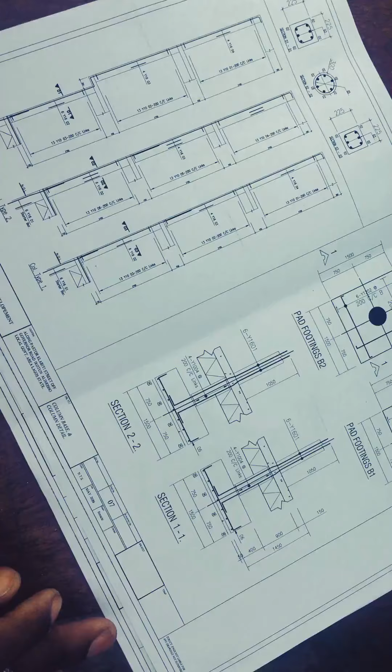In this video I'm just gonna be explaining to you about the column base and the column detail. Here we have the column base, here we have the column section for the underground one, and then here we have the column going up.

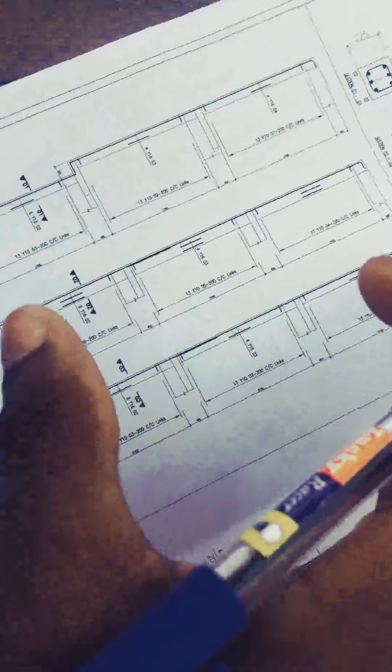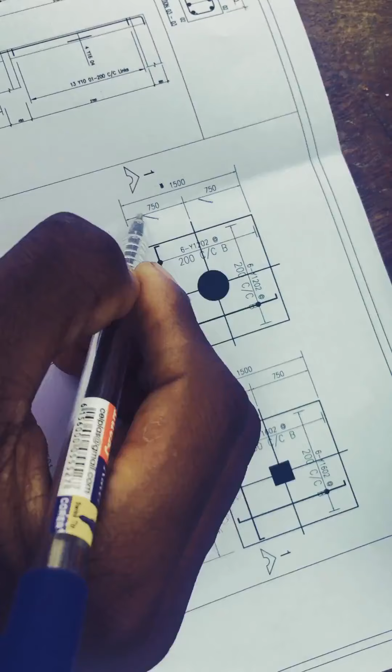So here on the column base, this dimension indicates the overall dimension of the column base, the pad footing, and here also indicates that it is the overall dimension. Here indicates that from the middle of the column base to the side, we have 750 mm and 750 mm to the side.

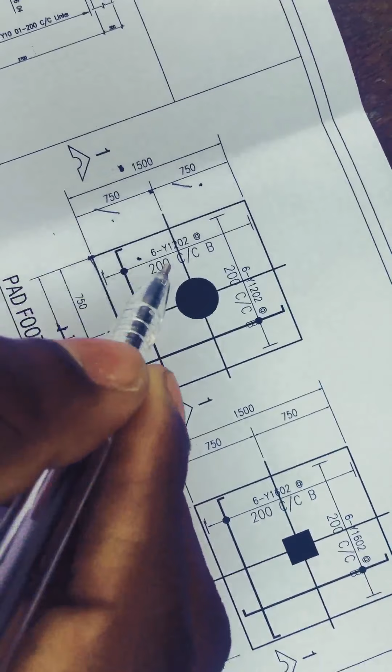So talking about the reinforcement inside the column base, we have this here which indicates 6Y1202 at 200 center to center bottom, which is saying that we are having 6 of this reinforcement going up here, 6 of Y12 at 200 center to center going up there, and the same thing happens here also.

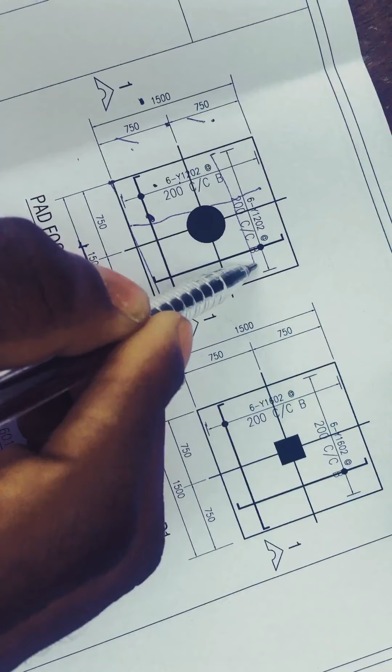It is saying we need 6 of Y12 with bar mark of 02 at 200 center to center bottom, which is going to be stretched along this side, and the same thing happens here also. So let's just go to the section of the pad footing.

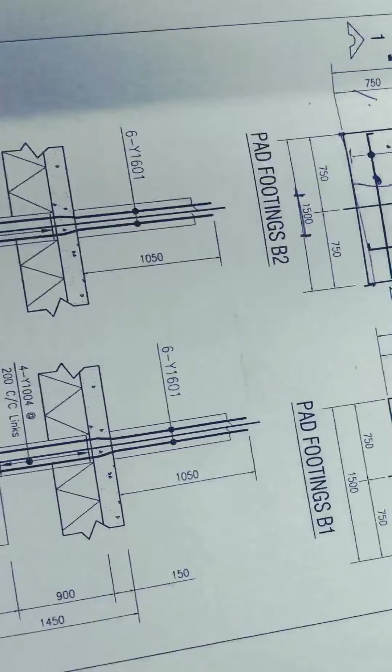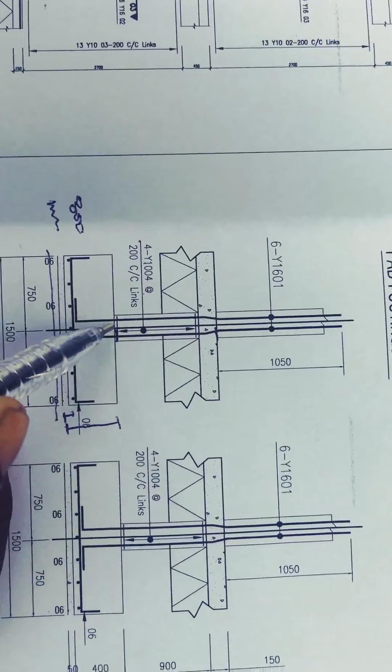Here we have the base of the column, we have the blinding here, and then we have the column base itself to be 300 mm. We have here the starter bar, which indicates we need 4 of Y10 to hold this reinforcement from here to here, and then we have the starter bar here going up, which we will join another one. The same thing also happens to this other side.

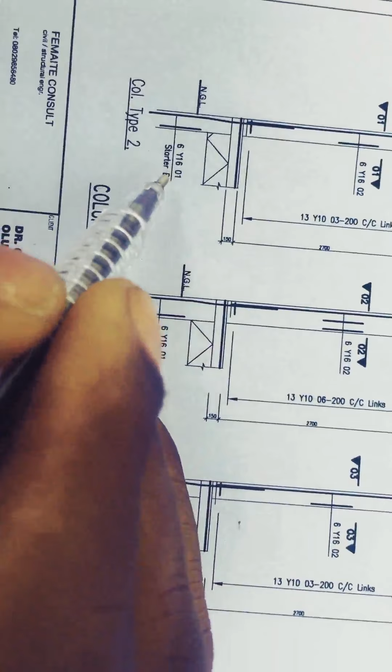Moving to the column detail itself along the side, which indicates that we have 6 of Y1601, which is the starter bar. If we were to look at the section, we can see here that we have 6 of the reinforcement, 1 2 3 and then 4 5 6. So 6 of this reinforcement is needed here, and then 13 of Y10 is needed to link the reinforcement together.

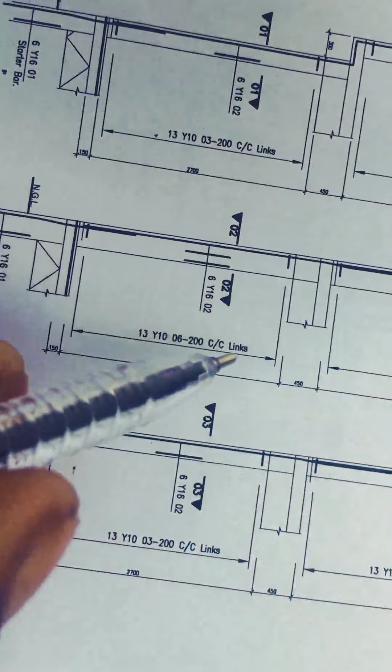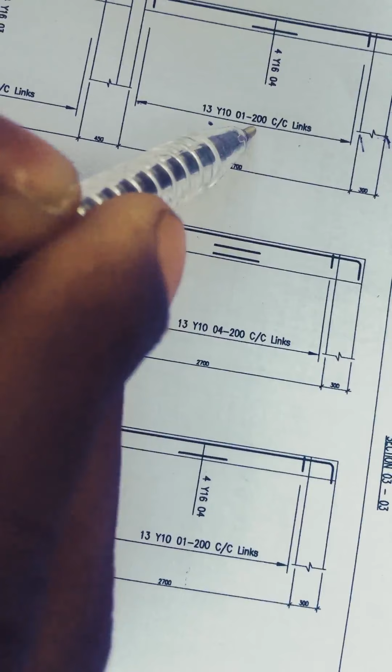And also here indicates we need 6 of Y16, and that is what everything is just saying. So going up here also to the roof beam, it is indicating that we need 13 of Y10 01 at 200 center to center link, and that is what everything is saying.

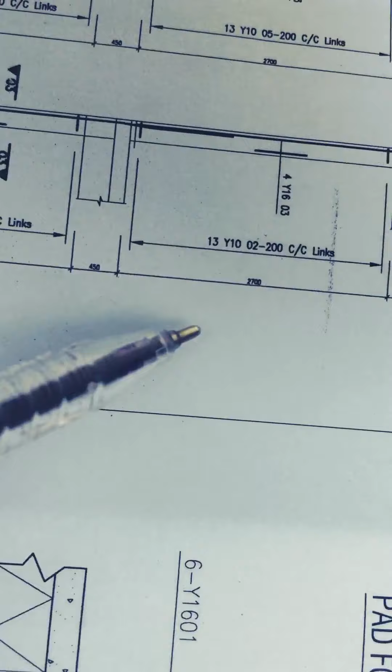Only if the column is different, which we have a circular column here, we will need at least 6 of the reinforcement in a circular column, and in a rectangular column we need at least 4 of the reinforcement. So here we have 4 of Y16, 4 of Y16, and then 4 of Y16 is also needed here. And for the starter bar we need 6 of Y16.